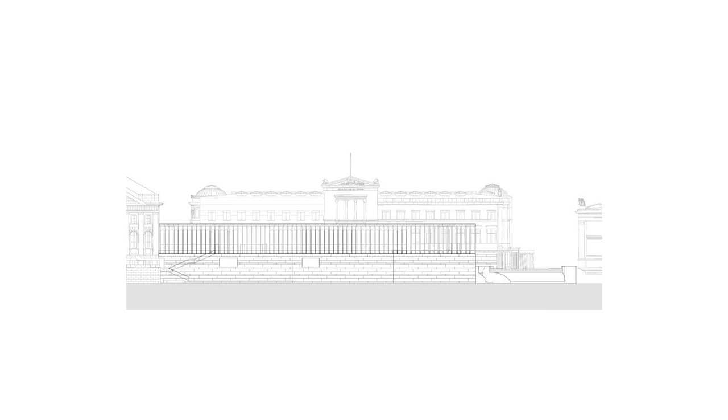This is the Jumex building in Mexico City. Unlike the James Simon Gallery, which, as I will try to explain, we pulled out of the place, trying to find a building in its own highly charged historical and overloaded context, Jumex is imposed, its form self-consciously asserting itself in a place that has no apparent urban order other than that which might emanate from the building itself. A site that confronts a very different type of context, a developing place with no apparent city plan.

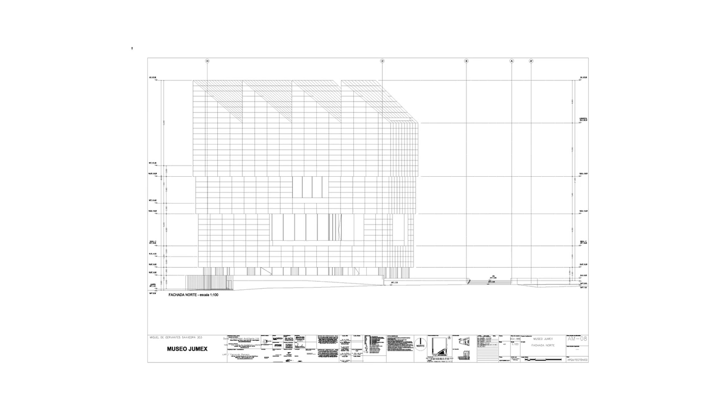But rather an evolved development based on investment and overlaid with some architectural and cultural ambitions. These two situations refer on the one hand to the planned European city struggling with its history and trying to deal with new pressures of investment and development, and on the other, the free market, investor-led city that is now the condition of most city development.

This is the Museum Island in Berlin. The James Simon Gallery is one of a series of projects on or around the Museum Island, and one of the projects that are strongly related to what one might grandly call the reconstruction of Berlin.

This is the Museum Island. In the front, you see Schinkel's great Altes Museum. Behind that, still in its ruined condition, is Stüler's Neues Museum. Just to the right is the Old National Gallery, then the Pergamon, and then the Bode Museum. In the forefront, you see the cathedral, and we are hovering above the site of the Schloss, which will again contain the reconstructed Schloss. More about that later.

Just go back. You can see that when Schinkel built the Altes Museum, it faced across the Lustgarten to the Schloss. It was a building absolutely in relation to the castle, with the cathedral on one side, the university on the other. So you had the king, you had the church, you had the university, and actually you had the military behind.

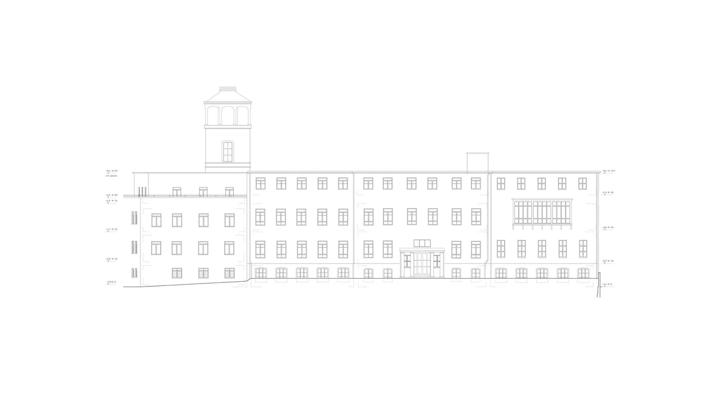Drawn, which looks better. But this is our project, so you can sort of see what we're up to.

We're trying to re-establish certain qualities of the original, which is the roof in the middle here, trying to get this back into a centralized composition, as opposed to this, which has been sort of neutralized.

We've integrated the window. We've gone underneath this brickwork and found the original format of the windows. We don't believe in putting a tower back here, but instead we balance this with a new building. That's the new building.

So as in the original, this composition which sat in the street but had one of its wings addressing the Spree, we redo that.

This is our own office. About 10 years ago or so, we bought an old factory, which is the one at the back. This is a very Berlin hippie scene here, people sitting.

That's our office. There's a slice of land which goes to the street, and this used to be a typical Hof courtyard system. So there was a front house, a courtyard, where this little low building was there was another building, then another courtyard, then another building, then another courtyard. That's a system which happens very much in Berlin.

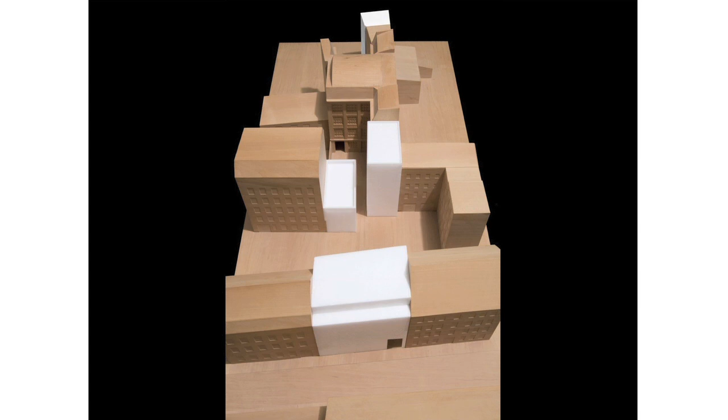So there isn't - the regulation takes advantage of the fact that there's now, as it were, cross ventilation. So you shouldn't really recreate the historical condition. You're collaging with these sort of elements that were there. The idea of trying to recreate what's missing is not appropriate.

So our project was to rebuild the front house, reestablish the street, and then build two volumes that create a new courtyard and imply this layering, but by not filling up this space, keep this newfound quality which the ruination had somehow exposed. And then that's the building to the street, our cafeteria, and the street itself.

So the final project I want to talk about before James Simon is a building which is next to Museum Island. It's the first new building we did in Berlin, in the center of Berlin. It's a gallery house on an empty site.

Literally overlooking the Lustgarten at the back of the National Gallery. And here is the building, complete, where we've tried to find a sort of relationship between completion and respecting, taking the urban block around, using mass to, in a way, replace the lost mass in brickwork - second-hand brickwork - which is then finished with a lime wash to sort of unify it.

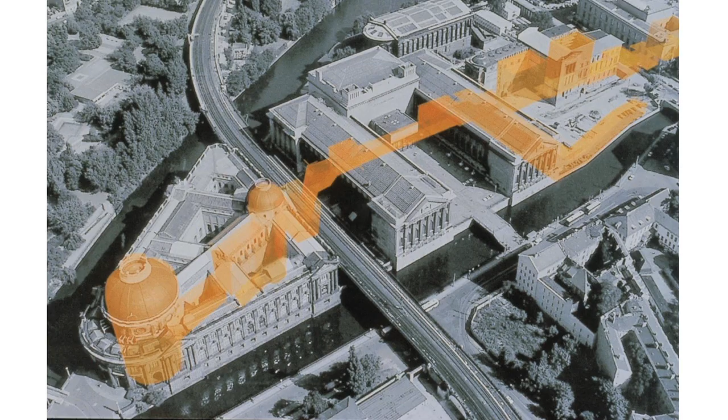We were, having won the competition of the rebuilding of Neues Museum, which is here, appointed master planners to come up with a plan for the whole island, and that involved the building of a new building here.

Let me read a little bit. The need for a new structure on this piece of land, previously occupied by the warehouses and the director's house built by Schinkel, was stimulated by the need to create connections between the museums and to provide visitor infrastructure that has never existed. Before the war, the buildings were connected above ground with bridges.

This route, if it was to be reinstated, would have run through the most fragile rooms of the Neues Museum. And as we anticipate large visitor numbers to run between the archaeological collections, we insisted that these bridges were not rebuilt, but instead we connect the basements.

So, as part of that, we had to find another way of connecting the museum complex, which are these 5 buildings, which all sit independently with their doors facing in different directions. The Altes Museum faces south. The Neues Museum faces east onto this common space with the National Gallery.

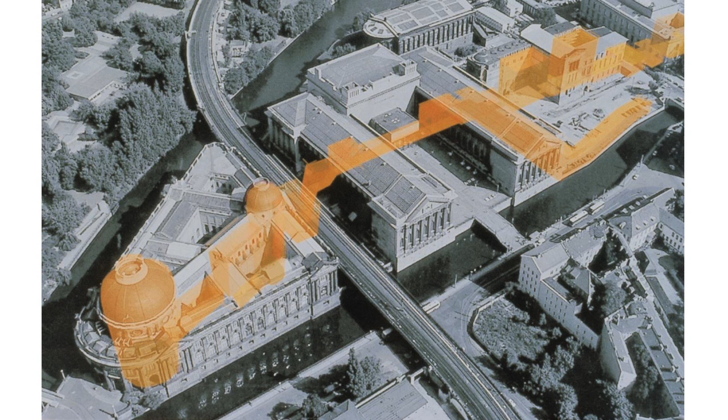Historically, there was a bridge here, a bridge here, and a bridge here. We can't put this one back because of the railway, and we insisted that you couldn't put one back here because of the historic rooms.

So it required a new intervention, and on top of that, the whole complex is short of a number of infrastructural issues, such as auditorium, temporary exhibition space.

So we worked on a sort of feasibility study for a new building. It would be the first new building on the museum island. And the building had to contain a whole number of infrastructural elements that didn't add up to being a museum. It actually added up to being a sort of entrance and a facility, shops, restaurant, auditorium, temporary exhibition.

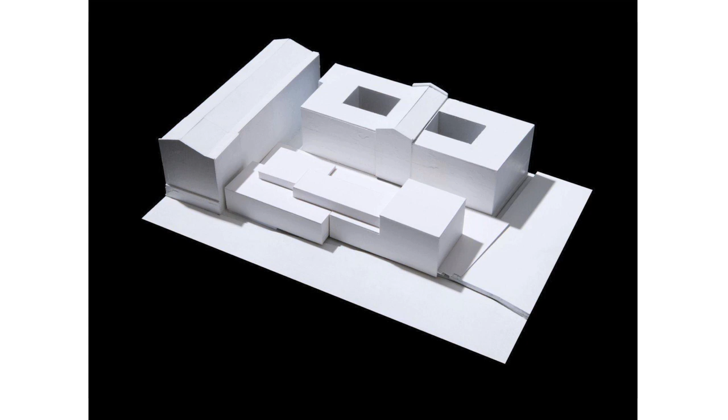That also had to start to link into the Pergamon to compensate for what I've just shown you, that we need to find ways of connecting the northern buildings to the southern buildings. So all of a sudden, this strange volume had to be plugged into the Pergamon, should somehow connect underground to the National Gallery, to the Neues Museum. Not really be a museum, but sort of have an identity.

It was very interesting. When this went out into the public realm, there was a sort of cool response that no one sort of tore it down. I mean, we did develop elevations and things for it, but it was clear that somehow it hadn't captured anybody, and also we hadn't become convinced ourselves about what this thing was.

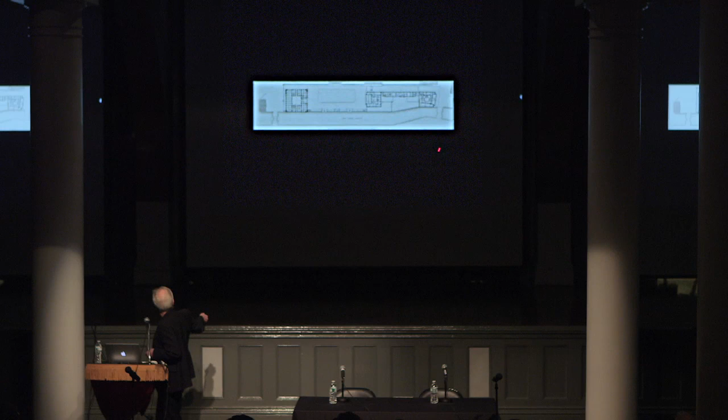It literally sits - this is Schinkel's plan. The Pergamon now sits here. This is the warehouse that Schinkel built, and this is the director's office of Schinkel. So there were always buildings here. There's the kink in the river. There's the Eiserne Brücke here. The gallery house I showed you is here, and the Neues Museum is there.

So the project was on hold, and then it received financing. And before we started redesigning, we spent 3 months with the general director of the museums and the president of the foundation, brainstorming about what this building should be.

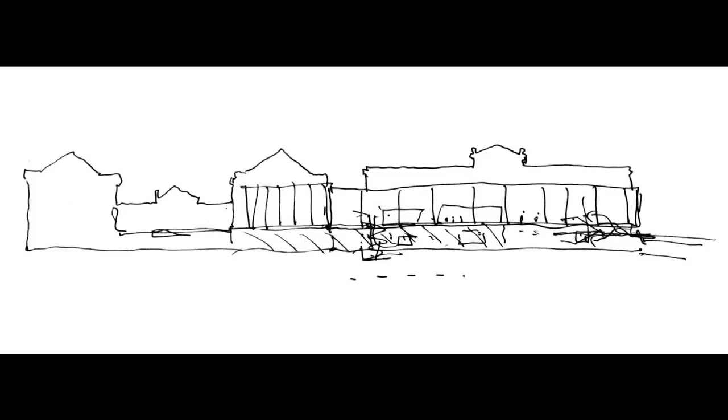This childlike sketch actually is something I did in a meeting to say, what we really want here is something like Mies' National Gallery, because what we want is a space more than a building. We want a room. And this wonderful building, which functions rather poorly as a gallery, does have this wonderful representational space that everyone struggles to use.

Incidentally, we are now in the process of restoring this building. It's another project where we've been given the responsibility to effectively take this thing to pieces for 5 years and put it back together so that it looks like it did at the beginning. But it's a wonderful project to work on, trying to solve issues that Mies didn't solve, but without destroying his details, because then you've destroyed the building.

Anyway, this was a reference to us in the sense of saying, what we want here is not a solid building, we want something that accepts people in. And of course, Mies was inspired by Schinkel, and Schinkel's great Altes Museum also has clues, and the clues on the island in terms of this language of porticos, staircases, a sort of architecture of the interstitial.

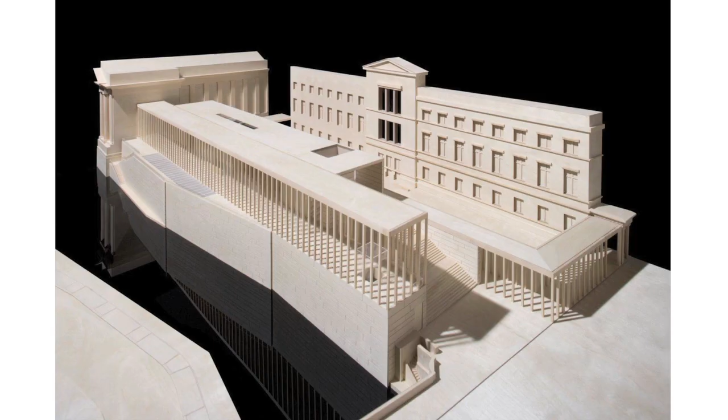So what we became interested in is to knit ourselves into this system. And so the project sort of dematerialized from being a volume into a series of elements. The first being a base, which is extracted from the base of the Pergamon and forms a new canal wall as it goes around the whole island. The second is this colonnade, and then the third is this sort of portico. So the building disappears into this architecture, which has a sort of classical reference.

This is within our own biography. This is the Marbach Literature Museum, which we built 10 years ago or so, near Stuttgart. Probably the first in the south. After the war, it was really unacceptable to build any architecture that had any sort of classical allusion. The National Socialists had somehow confiscated this architecture, and it was sort of untouchable. So this was our sort of bringing back onto the table the idea of a sort of classical architecture.

And in a way, that's what we're doing with this. I mean, they're not really columns, but they are load supporting. So in fact, it's also an archaic architecture because every one of those mini columns is structural. So the facade becomes very materialized. It also creates spaces which are, again, interstitial. So the project expanded out of this.

This is the plan, so you can see this is the ground floor. You can see how the colonnade wraps around. The first responsibility of this building is as a connector. So it connects on the ground floor. You can go up these steps. There's the auditorium. There's the temporary exhibition. You can enter here and you can go downstairs.

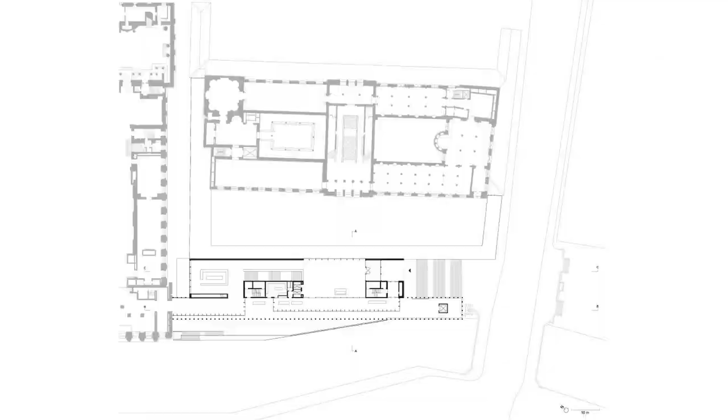Or you can go upstairs. If you go upstairs, then you can connect into the Pergamon Museum. And if you go downstairs, you can connect into the basement areas, into the promenade and the lower levels of the museums. And therefore, this building presents itself as something which has a sort of classical aspiration.

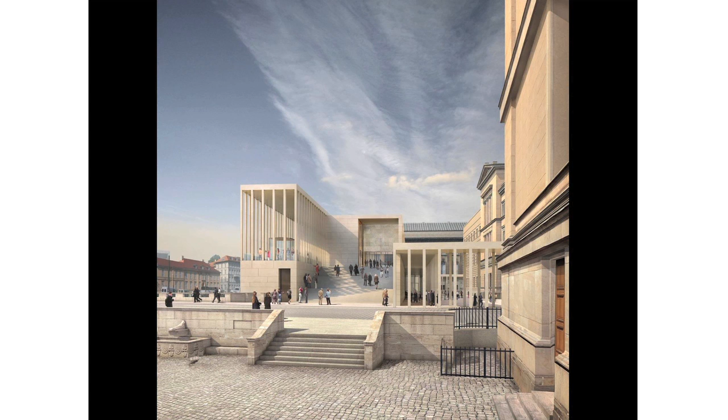But at the same time it walks a very fine line between being a sort of minimal construction, nearly an archaic construction, and something which seems to be extracted from the historic context of the museum island.

That's how it will finally look. And going full circle, a sort of strange thing that we did at the very end, before we closed the National Gallery, we did this installation of putting 144 columns into Mies' columnless space, as a tribute to the lost column, the column that has somehow been lost in history.

Okay, I'm going to go very quickly through this project. It's simpler to explain. This is the Jumex, center of Mexico.

Everything that we had in Berlin in terms of an urban setting is completely different here. This is a mishmash of everything. We even have a live railway track running every few hours past through this public garden. It goes at about 2 miles an hour, so it's not dangerous, but it makes a huge amount of noise. This was an industrial area. The train still services that industrial area.

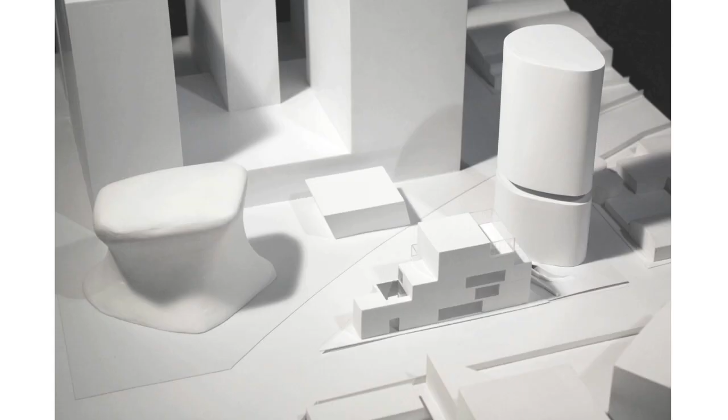So here's our site, here's our first pathetic scratchings around trying to find a way of building in this context, amongst these sort of giant, intimidating volumes. So we worked our way around from the inside, trying to think what sequence of rooms we could make, what delicate little building, and at the same time aware of these gargantuan monsters hemming us in on all sides, trying to optimize this strange triangular site, gradually finding our way towards something which has something in it.

Having said that, there's a struggle on the inside of the building. The client's desperate for big rooms, not broken up rooms, so the biggest rooms that we can get onto the site. So here you see the beginning of a project.

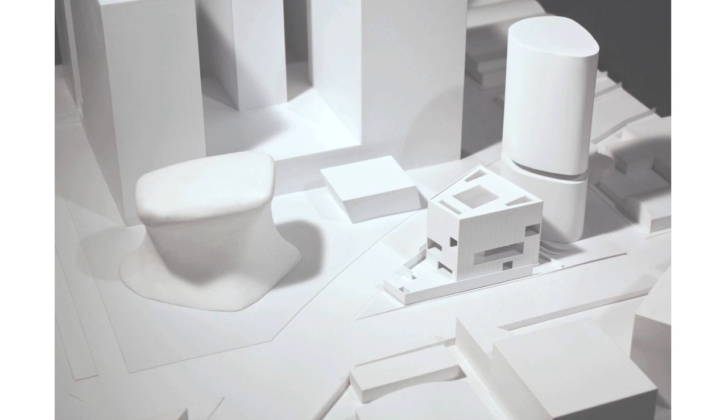We've established a sort of base. Public space in Mexico City is difficult, and difficult to maintain, but maybe we thought if we create a sort of semi-public space by just going up a bit, we're starting to get a volume which asserts itself. You can start to see big windows and a skylight.

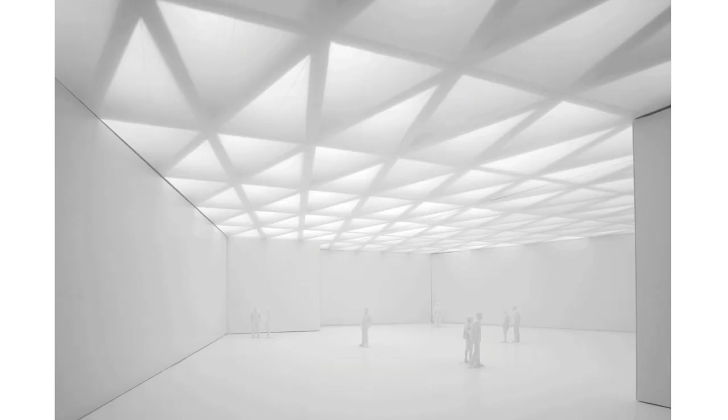We then tried to work out how, it's a vertical museum. In a vertical museum, you've got to reward people when they get to the top, and they've got to have daylight. There's got to be something that happens when you get to the top. This triangular form actually makes it very difficult because you always get this sort of perspectival consequence, which you don't really want. The geometry starts dominating.

And then you're thinking about the roof profile, and of course, in a way, one is sort of worried about the assertion. I'm being honest here that I felt under a certain pressure that after everything I've just said beforehand, I sort of felt the shape was important. I know I shouldn't admit it, but we are in some sort of territory here which is already defined by the battle of shapes. We have the shape of all shapes across the road.

So I then felt there were two things that came together. One is a lack of, it's a real struggle with how do you do top light, and how do we give the building silhouette. So we started to work on a roof light solution. We've done that in Wakefield, the building we did for the Hepworth collection, using a sort of non-rectangular space, which is right nice. So there was one issue about the roof.

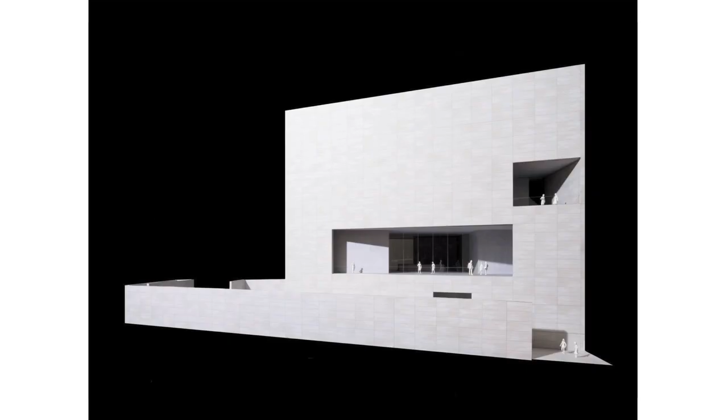The other is about the ground. How can we make this building as open as possible? The client is very, very conscious—it's a private institution in a way, but he wants it to be a public building.

There's two ways. In essence, up here is a treasure box. We don't need too many windows in here. The idea was to try and make the lower floors as public as possible. I was interested in making a sort of useless room here that wasn't a real gallery, rather like Mies's National Gallery space, something you'd learn how to use, but would be a dialogue between—it would allow you to look into the museum.

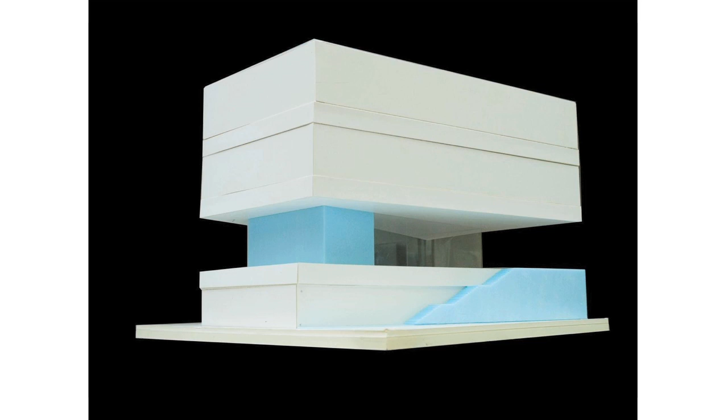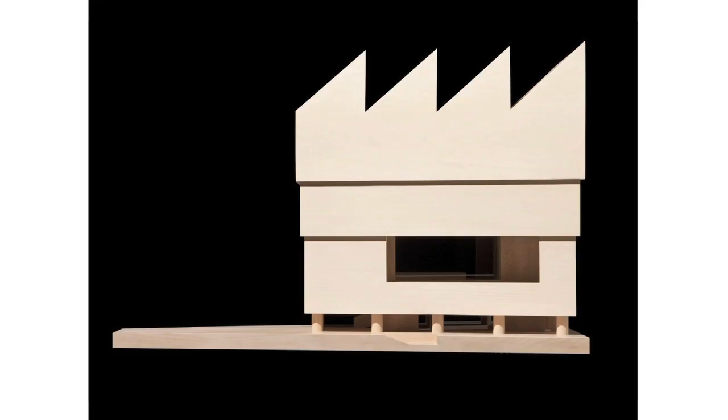And then there was another idea, which is also about framing the views around the site. So here it sort of goes, it's all happening at one time. So we've got a plinth. We've lifted the building, but we've created a sort of skirt. So we've lifted the building and then brought it down, to 2.3 or something like that, because it's a pretty ugly context around here. So the idea was, in this Japanese way, of framing that view.

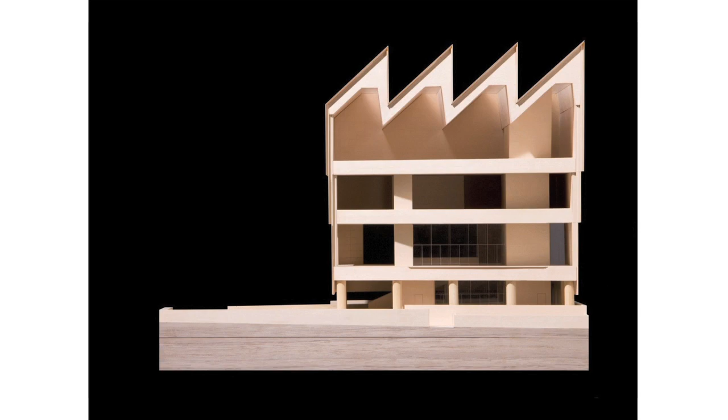All of the window frames were made by another small company, the doors were made by another, so we were working all the time with the builders. It was an enormous relief, and we were completely surprised at the quality of construction we got because of the engagement with the people who made the building. Because at the beginning, everyone said you can't do good concrete in Mexico, you can't do good metalwork in Mexico.

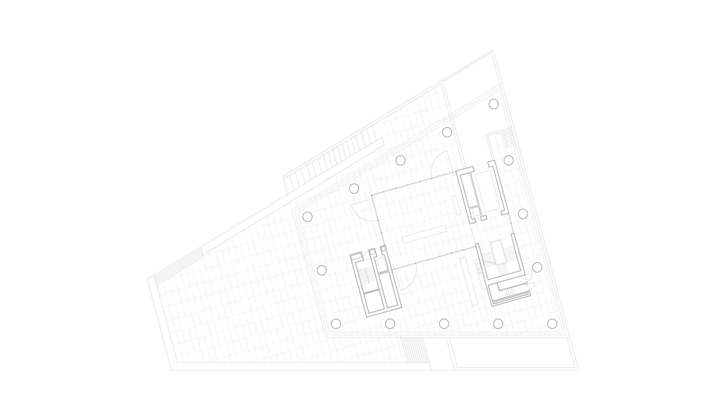And then moving up, this is the vitrine space—this idea of a room which is not an auditorium, it's not an exhibition space, it does nothing properly. We refused to turn it into a well-performing space, so we didn't crank it up in terms of being a great place to do lectures or a great place to do exhibitions. It's a mediocre place to do all of those things. But on that basis, it can do a lot.

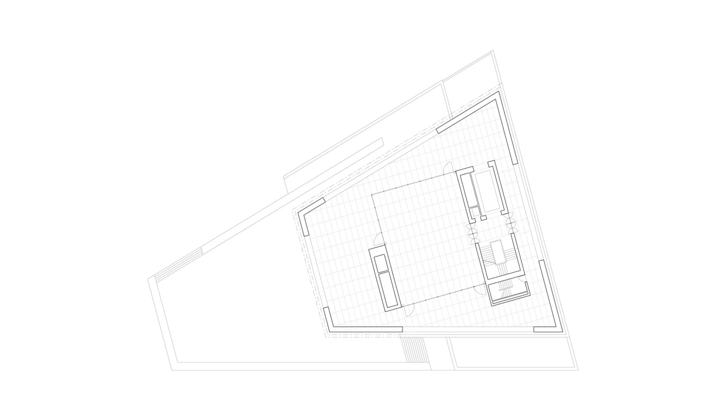So it's a glass box inside the bigger box, and this is a public balcony, and that's the empty, useless room, becoming slightly more useful. And actually, it is completely used—it's used for conferences, discussions, dance, puppet shows, parties, continuously. It has a big curtain, so we can close it off. But it was very nice.

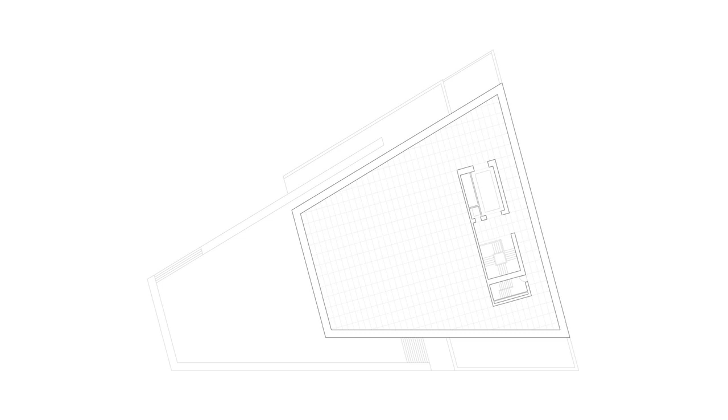Then, if you go up the building, we get the more conventional spaces, the 3rd floor, and then the top floor, which is lit—the biggest room we could possibly get onto the site—with this spectacular top light, really beautiful top light, and these walls are temporary walls. The opening exhibition. That's it. Last slide. Thank you.